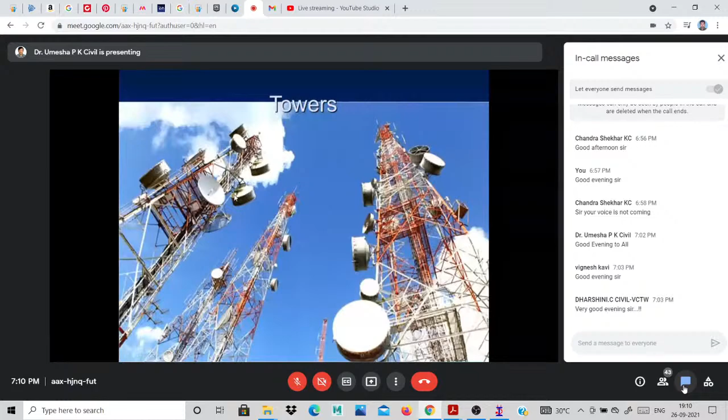It's a question. These are all cantilever towers, so all the antenna will be hosted along the tower. It may be having a dish antenna, or GSM antenna, or different types of antenna, all used for communication.

You can see here, this is a TV tower. It can be a steel TV tower or a concrete TV tower. This is another type, a microwave tower, and this is called a pole type tower. It's having only a pole.

You can see here, a number of antennas will be posted at the top of the pole. And for the police, telecommunication, or communication between place to place, they'll be using guyed towers. If you have a large area, they'll be having guyed towers like this.

Usually it requires a large area for the tower. One mast will be there at the center, and it will be tied with guy ropes at different levels. It will be very economical, but it requires a large area. That is a disadvantage here.

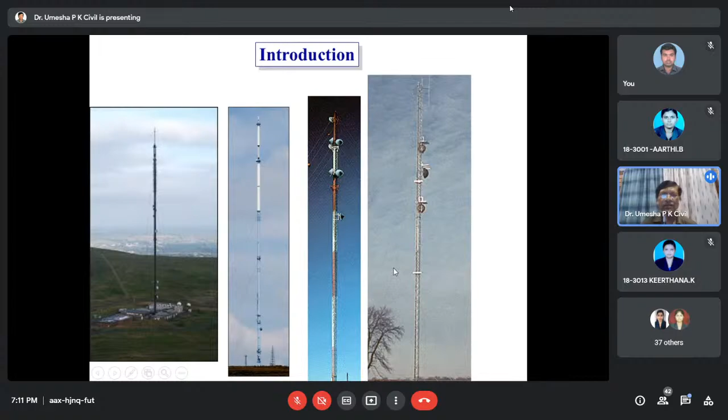Tower and tower-like structures are the two major infrastructures for transmission of electrical power or telecommunication and broadcasting. The towers are highly repetitive, you might have seen so many towers everywhere, either electrical power or communication towers. It has to reach from one place to another place, having the same line of sight.

Communication towers will be having the same communication line of sight, so it will be repetitive. Hence analysis and design should be highly competitive, toward commercial solutions. So what you want to do is optimize the tower design so that minimum weight and optimum efficiency is achieved. That you have to see.

These towers may be used for different telecommunication purposes. Today I will talk only about telecommunication and broadcasting towers, not power electrical transmission lines. Only telecommunication broadcasting towers. So mainly, what are the telecommunication types?

Microwave towers, television towers, radio transmission, receiving signals from the satellite - for that also they use towers, and receiving signals from air traffic control. These are some different types that will also be there. So we'll see how we're going to design this type of tower.

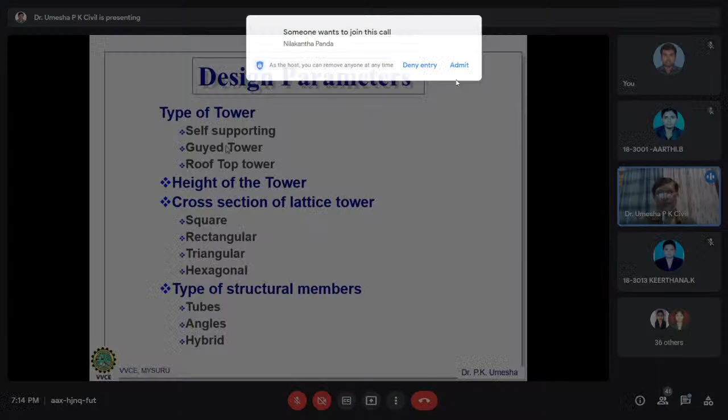Rooftop tower: in the city area, they want to use the rooftop tower on top of the existing building. So we have to take a lot of consideration for how to design a rooftop tower - it's very interesting. They have to consider the building height, the condition, the health monitoring of the building, and the height of the tower.

Its height also depends - it may be 50 meters, 20 meters, 100 meters, or 150 meters. Height also matters because of the wind load, which varies from base to top. Because of that, the height is very important.

The cross section of the lattice tower may be square at the bottom, or rectangular, or triangular, or it may be hexagonal, or circular. The types of structural members, as told earlier, may be tubes, angles, or hybrid. Hybrid means tubes will be there and angles also will be there - there are different types.

So once you see that, what is the condition? These are the different parameters you have to consider for the design of towers - starting from the type of structure, terrain type, loading condition, type of tower, and height is also very important.

Cross section also matters - square will be having diagonal wind loading. There also have rectangle and triangular to consider. Of course rectangle is similar to square only. Triangular will be having load acting on the normal surface and also from the backside to consider.

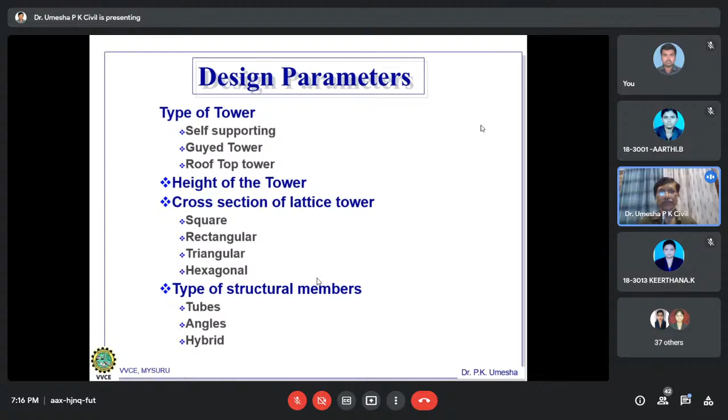So in the design parameters, the wind IS code is also very important - what code you are going to consider for the design of these telecommunication towers, that's also very important.

Previously they used to have IS 802 as the code for the design of telecommunication towers. But now they insist you should go as per IS 800 2007 for the design of telecommunication towers. If somebody wants to use IS 802, they should check the load factor - it doesn't have any load factor. It's the code for power transmission line towers.

So mainly there are a lot of transmission towers, and they want to optimize the weight, hence they don't have any load factor. So if you are designing for the telecommunication tower, you should use the load factor.

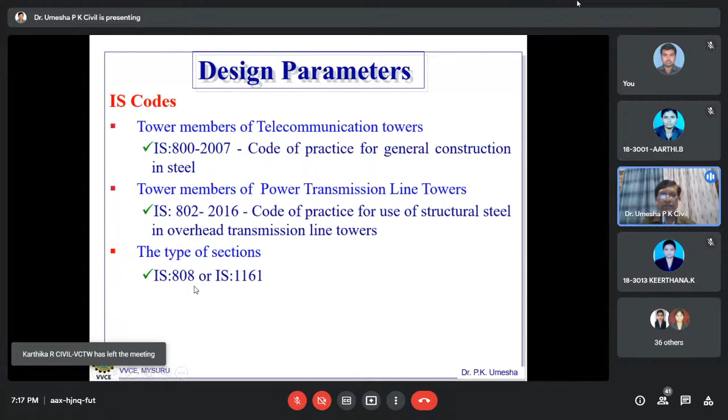For the type of sections, it will be there in 808 or 1161 that you have to use. Another one is the material used for the tower members - the grade of steel is given in IS 2062.

And for wind load, we might have seen the different IS 875 codes - part 1, part 2, part 3, part 4. Part 1 and part 2 are dead load and live load. It's IS 875 part 3 that has been revised in 2015 - this is only for wind load conditions for buildings and structures, applicable generally to all types of buildings and structures.

IS 1893 part 1, 2016 is the criteria for earthquake resistance design of structures, which provides provisions for buildings. Another code, IS 1893 part 4, gives criteria for earthquake resistance design of structures for industrial structures, including stack-like structures.

Here they include the transmission tower and telecommunication tower. So if you are designing a telecommunication tower, you have to take into consideration IS 1893 part 4 also - that's very important. So we'll see how these codes will be applied for the loading condition.

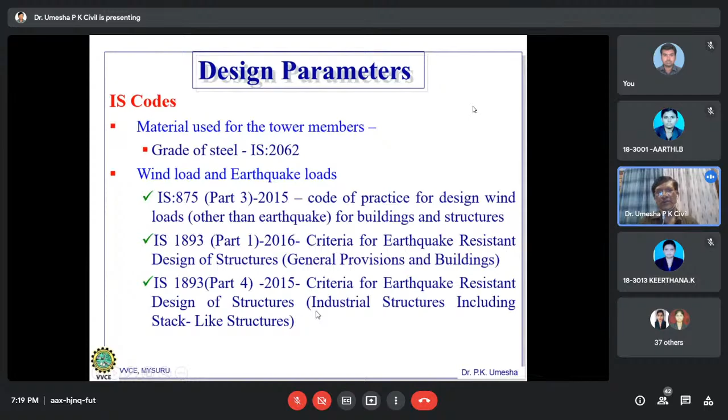So I'll talk about wind load and earthquake load. Now, what's a component? First let me explain the anatomy of a tower. A tower means it will be having panels - what is a panel? I will explain that.

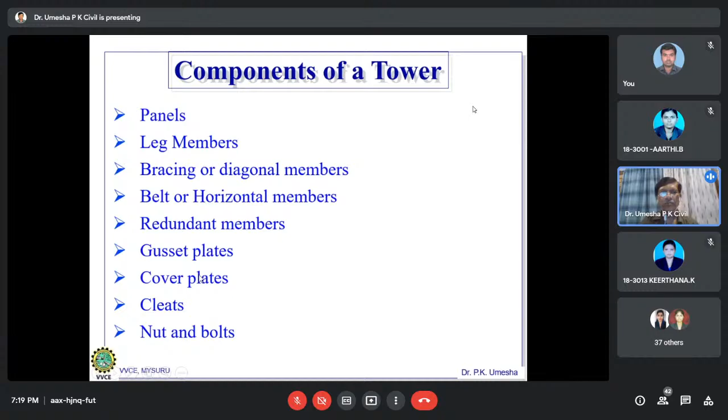What's a leg member? Bracing or diagonal member, belt or horizontal member, redundant members, gusset plate, cover plate, and nuts and bolts will be there.

Generally you might have seen the tower, full towers will be like this. One from here to here, that color differentiation you might have seen, this is called one panel. So there is one panel here, this panel. The tower will be having the main members, 4 or 3 or 6, projecting from the ground level to the top. That is called leg members.

If we have the diagonal members, also called bracing members, main bracing members, it will be there. It may be K bracing or X bracing like this. In between, they will be having secondary bracings, used to reduce the buckling factor. If we have a tower leg member from here to here and we want to reduce the buckling length, that is very important for the compression design of members. In that case you can have secondary members so that the buckling length is reduced. If we divide it by 4, the total length divided by 4 is the buckling length for compression, reduced to 1/4.

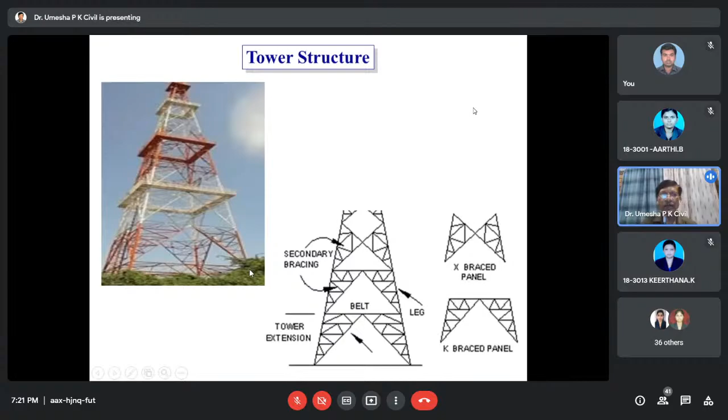Like that, different panels you can see here. This secondary member you might have seen in the tower also. So here you can see what is a gusset plate.

Gusset plate will be connected from the leg member to the bracing member, and they will connect with nuts and bolts. This is gusset plate. And here these are cover plates.

You might have seen, from one member to another member, they will be connecting with cleat angles as well as cover plate. Cover plate will be there outside, and cleat angle will be there inside of this angle. This is a main leg member projecting from here to here.

They want to connect at this point, or at every 6 meter length, they provide it outside, that is called cover plate. It's not fully connected. Here you can see all the bolts will be there, and inside also there will be a cleat angle. You might have seen single shear, double shear. So if you provide cover plate as well as cleat angle, it will be double shear.

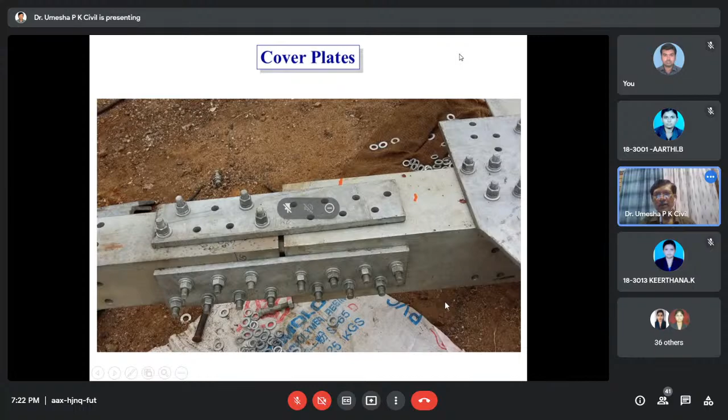This is the gusset plate you can see here also, just trying to connect this one. And here you can see this is called cleat angle, it will be inside. This angle member will be used for the tower.

It is actually star angles. Star, you might have seen that two angles will be connected like this. They will also be having cleat angles here, connecting from one leg to another leg member at this point. You can see a number of bolts, so many bolts, and leg members will be very heavy. If you want heavy load, they will be using star angles for the tall towers.

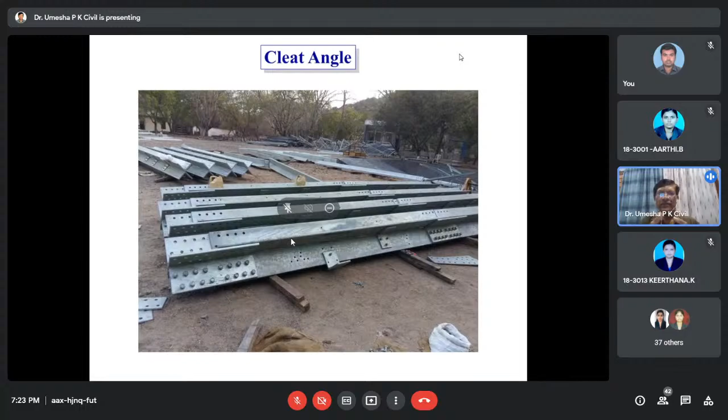For small towers it will be only maybe 100 by 8, 110 or 130. For 150 meter height, like TV towers, they should use star angles. Star angles means two angles connecting here. Once again, cover plate as well as cleat angle will be there.

If you want to reduce the width, bottom, if you have a reduction, it will become very narrow, and the foundation forces will be more. And if you have a large area, you can increase the base width, foundation forces will reduce, and you have to optimize the weight as well as foundation forces. That is also very important. If you cannot have large base, if you have large base width, the bracing members will become more, so it will increase the weight of the tower. So you have to optimize both on that one.

And geographical location of the location for wind and earthquake loads. So you might have seen that IS 875 and 1893, it divides our country into different zones. So you cannot use the same tower in all zones. So that is very important. So I will show you that on how it will be varying in our India for wind as well as earthquake load.

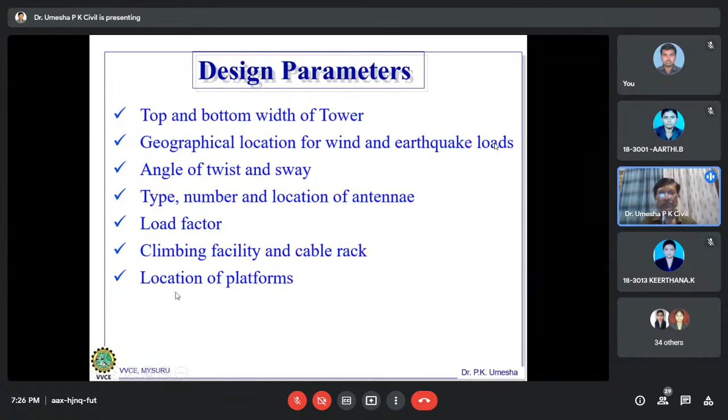This cable, you might have seen that one. So many towers will have cables running from top to bottom. So they will be providing the cable rack so that they will tie it in the cable rack so that it will come down in a line without any disturbance when wind is blowing. And also location of platforms that also attracts wind load. So that is also very important towards the location of the wind platforms.

So computation of loads, the thing on the tower, it will be wind load on the tower members. You might have seen the tower members are very skeletal. It doesn't have any wind load and all. So it will be having more wind load than our other buildings also. So antenna, what are the types of antenna, ladder, platforms, members - all the things it will be attracted by the wind load. And dead load of the tower members, antenna, ladder, platforms, and their mounts - that also have to consider.

Live load on the antenna platforms and rest platforms, that also required. Seismic loads you have to consider. And similarly, miscellaneous loads like erection loads, temperature loads, ice loads in different areas of the country. You have to consider the ice load, either the ice load or temperature load. The erection load is required to erect the tower at different heights.

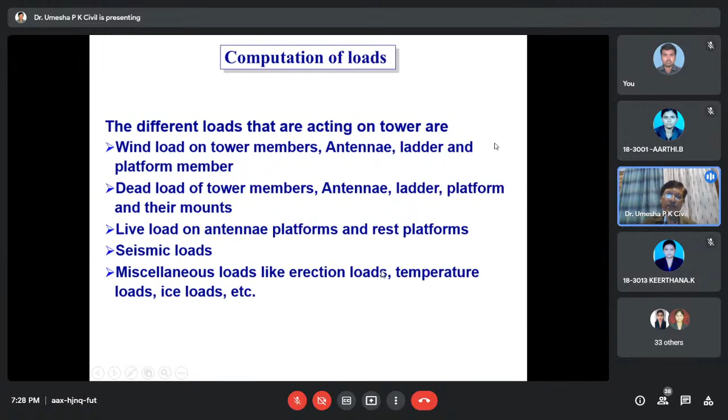So wind load, if you consider in the tower in our India, wind load is the most important of all. It often governs the design. Whatever it may be, the wind load affects it. So in India, I have seen a lot of towers we have designed. So far, we have designed towers governed by the wind. So dynamic effect due to wind.

So another criteria is called - if we have a natural frequency of the tower less than 1 hertz, I think I mentioned here, less than 1 hertz, then it will become very dynamically sensitive. So IS code specifies either the natural frequency less than 1 hertz or the height by breadth ratio greater than 5. Then dynamic effect has to be considered. In most of the cases, a tower up to 100 meter, dynamic effect will not control. Live load usually will be negligible. Why? So live loads, when cyclone is there, nobody will climb the tower and do the work.

That's why live load will not be considered for the combination. Only dead load and wind load or earthquake load should be considered that way.

Seismic load is considered in some cases. If we have a large mass at the top level of the structure, seismic load will be governing. In zone 5, usually the northeast zone or Kashmir zone, it will be governing. In Kashmir zone and northeast, ice load will also be there.

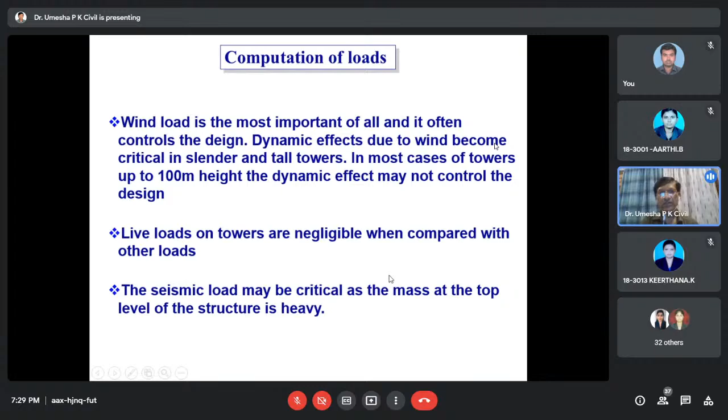For all this load condition, we have to follow IS 875 for wind load, IS 1893 for earthquake load. If we see IS 875, the design of communication towers is primarily governed by the evaluation of wind loads and their responses.

Wind velocity varies in a random manner, both in time and space. So IS 875 gives the basic wind speed, which is called the 3-second gust velocity at 10 meter height in category 2.

I will tell you what category 2 is. Category 2 is defined as the basic wind speed, that is the 3-second gust velocity at 10 meter height. In category 2, it's called basic wind speed.

The entire country is divided into 6 regions. It will have basic wind speeds of 33 meters per second, 39, 50, and 55 meters per second. So there are 6 zones divided.

The basic wind speed has been worked out for a return period of 50 years. The designer should select the basic wind speed depending upon the location of the tower, according to where you are locating it.

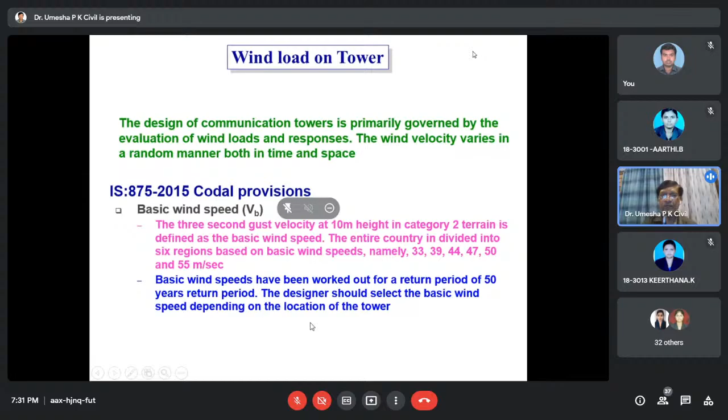If we look at the south, except in the coastal region, in places like Karnataka or Tamil Nadu, it will be having either 39 or 33 or something like that, less than the other zones. The blue will be 33, this will be 39, 47 like that.

So the difference is, whatever tower you have designed for Tamil Nadu or Karnataka, it may not be applicable for the northeast zone, because there is a different wind speed there. Wind speed is very, very important.

Then basic wind speed, and also the height of the tower. I'll just show you that one.

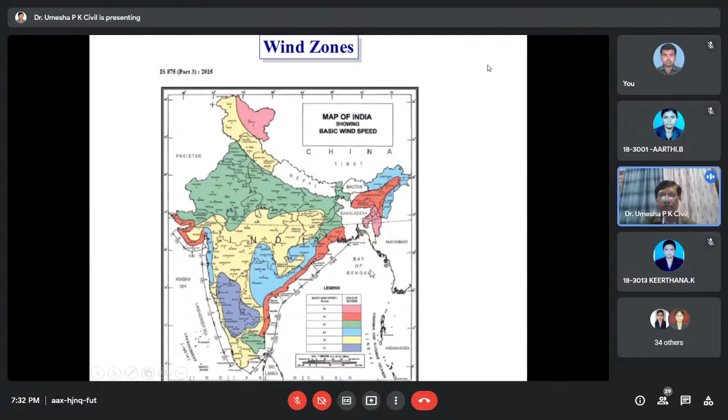It will have the across wind effect, along wind effect, and also torsional load effect. So all three effects should be considered when designing the tower.

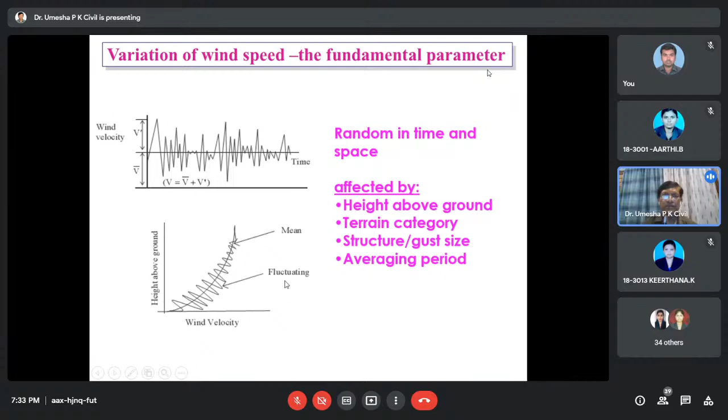As I told you, it will be random in time as well as space, affected by height above the ground, terrain category, structure or gust size, and averaging period. So all these things will be varying.

So whatever the basic wind speed is, use only the basic wind speed for that region. We need to calculate the design wind speed, which is calculated at a different height.

If you take 10 meters only, they give the basic wind speed. If you take 11 meters, it will be a different wind speed. Again at 20 meters, it will be different. How do we calculate that?

IS 875 gives a rational formula for the design wind speed, using the basic wind speed and K1, K2, K3, K4 factors.

It depends upon K1, the probability factor; K2, terrain category, height, and structure size factor; K3, topographic factor; and K4, importance factor for cyclonic region. 1.3 for post-cyclone importance and 1.15 for industrial structures, that is K4.

Recently in 2015, they introduced K4. Previously, they used to have only K1, K2, K3. You can see here how it works.

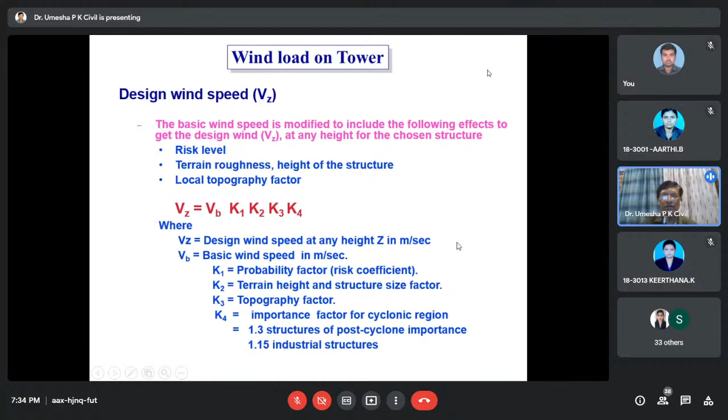For example, the K1 factor, the risk probability factor, is based on the statistical concept which takes into account the degree of reliability required and the mean probable design life of the structure in years.

If you see in the IS 875 table 1, it gives the K1 factor for different wind speeds and different class of structures, and the probable life of the structure in years. If you are designing any general structure or building, you consider only 50 years, so for all wind speeds it will be one value. That's why you can see here it is 1.

For communication towers and buildings, we should consider the probable life of the structure as 100 years. You can see the values for K1 for different wind speeds, varying from 1.05 to 1.08. So it's a small variation, but it's 5% to 8%. That is the K1 factor.

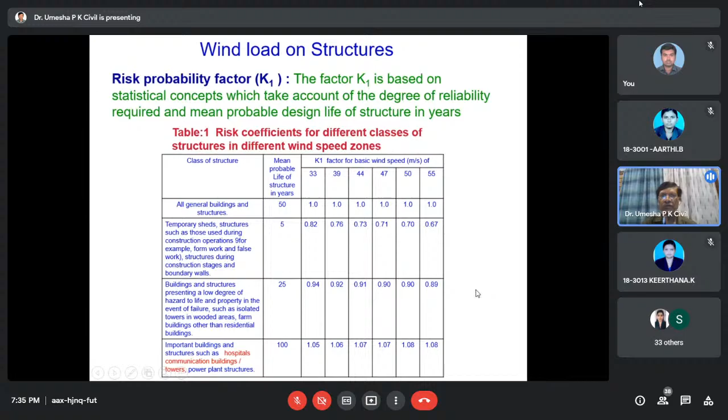K2 factor depends upon the terrain category. What is terrain category? There are 4 terrain categories. The first terrain category represents open sea or lake or unobstructed coastal area of land. If you take a coastal area of Tamil Nadu, it will be having no obstruction, so that is considered terrain category 1.

Terrain category 2 is defined as with scattered obstructions representing rural area. It will be having only scattered obstructions similar to this one.

Category 3 is characterized by closely spaced obstructions, called suburban residential area or manufacturing districts or wooded fields. This is terrain category 3. If you go to Bombay or Delhi, it will be having high-rise buildings, so you can consider that as terrain category 4, which is local, regional, large cities or urban areas.

Usually you consider terrain category 2 for our tower if you are in a small city, something like this.

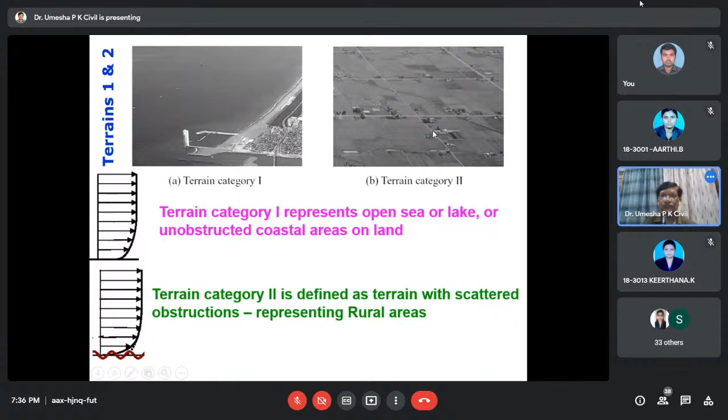This K2 value depends upon the terrain category and height. In table 2, you see the factor to obtain the design wind speed variation with height in different terrains. Previously they used to give each terrain category as A, B, C; that they removed now and made it only one.

So selection of terrain category is very important. According to the category where you are located, you have to define the terrain, and based on that, the values of K2 will vary. K2 factors are obtained for the design speed at different heights.

If we take terrain category 1, for up to 10-meter height it will be constant at 1.05. Variation will be there for 15-meter, 20-meter, and so on, varying up to 500 meters where it is 1.35, with different variation at each height. If you want to calculate for, say, 12 meters in between 10 and 15, you have to interpolate between these two.

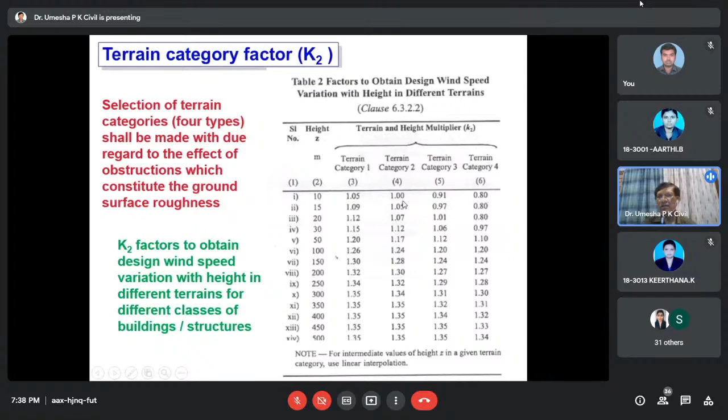The K2 value will vary between 1.05 and 1.09, so you have to interpolate for 12 meters. Similarly, you have to do this for different terrain categories. That is K2. Then K3 is the topographical factor.

Local features like slope and hills, valleys or ridges will affect the flow of wind and hence modify the wind speed. If you are constructing a tower on top of a hill, you have to consider the K3 factor: how tall it is from the ground level, what is the slope, and how far it is. There is a distance L, distance W, H, and crest, and the IS code gives you clearly how to take these into consideration for calculating K3.

So for slopes up to 3 degrees, you can take K3 equal to 1. It will vary from 1 to 1.36 for slopes greater than 3 degrees.

Then K4 factor, as I told you before, this was introduced in the recent code to ensure better safety of the structure in cyclonic storms. The cyclonic storm region is up to 60 kilometers wide on the east coast as well as the Gujarat coast. So from the coast point, up to 60 kilometers wide, you have to consider that K4 value in these two regions, that is the coastal area of the east coast as well as the Gujarat coast.

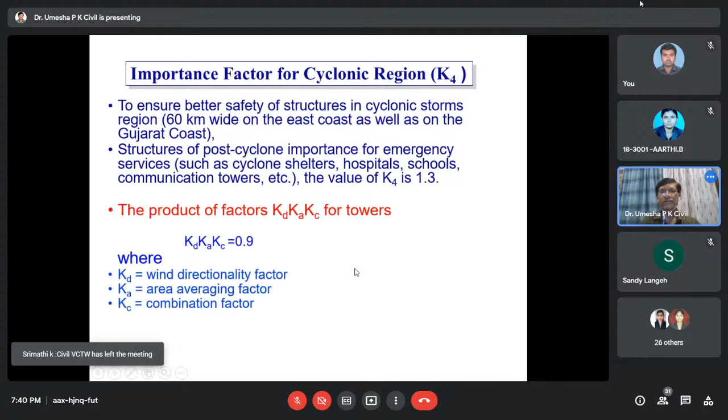Once we calculate the design wind speed, that is Vz, it's the multiplication of basic wind speed into K1, K2, K3, K4, and Kd, Ka, Kc. With all these factors, you will get the design wind speed.

Then we need to calculate the wind pressure, that is Newton per meter square, at different heights. This wind pressure varies from bottom to top at different heights. So Pz, the wind pressure at a different height, equals 0.6 into Vz square. Then the design wind pressure will be Kd, Ka, Kc into Pz. That is the design wind pressure.

Once you know the design wind pressure, pressure into area will give you the force. That is our intention - starting from the basic wind speed, we calculate the design wind speed, then we calculate the pressure. But once you know pressure into area, you get the force - but that alone is not enough.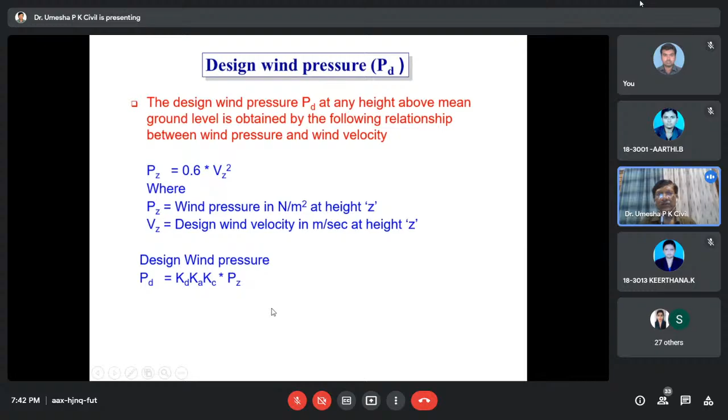Another factor depends upon the force coefficient. So force equals area into pressure, and also CF, that is the force coefficient. You need to calculate the force coefficient for skeletal structures and tower structures. That depends upon the solidity ratio of the tower.

AE is the effective projected area - whatever members are there, that area only has to be taken. Flats will be there, one side leg member, other side also leg member, and bracing members - all the length into width, whatever the width is. For example, if we have a flat of 50 by 5, you take 50 as the length dimension. And a leg member of 100 by 8, you take 100 into that length.

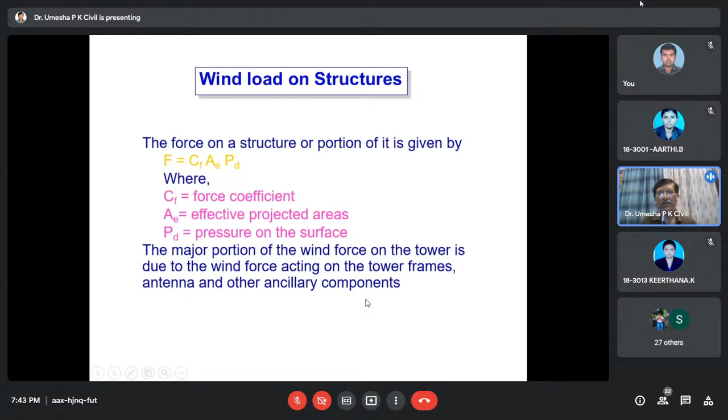So all these things you have to consider for the projected area, AE, and PD is equal to pressure on the surface. A major portion of the wind load on the tower is due to the wind force acting on the tower frames, antenna and ancillary components. Ancillary components means ladder or cable racks - all these have to be called ancillary components. Once you know your tower configuration - leg members, bracing members, secondary members, and ancillaries - all these will be there.

Then we need to calculate the force coefficient, which depends upon the solidity ratio. To calculate solidity ratio, if we have a tower, take it as straight - this is the tower leg member running parallel without inclination. Most towers will be inclined like this, but for your clarification, I will take only the parallel one. So what is the hatched portion you take here?

This is a small verification, and if you have ancillaries - whatever cables or ladders are there - all these are considered ladder ancillaries, denoted AAA. This is for the structure, AAS, the structure member area, that is the hatched portion, and the ancillaries, that is AAA. If you have AAA, you have to consider that divided by H into B, the area of the total enclosed portion. Similarly, if it is an inclined member, you have to take the trapezoidal area here - the hatched portion - that is AAS.

For a square tower with flat members, the maximum wind load occurs in the diagonal direction. So normal wind will be acting normal to the tower, that is P. You have to take 1.2 times of P in the diagonal direction for the square tower.

For the triangular tower, it is not like that. Whatever load is there, we have to apply normal to the tower at 0°, 90°, and 180°. Whereas for the square tower it is normal at 0°, that is normal to surface, and diagonal at 45° you have to consider. This is the flat force coefficient for the flat surface, square tower and triangular tower.

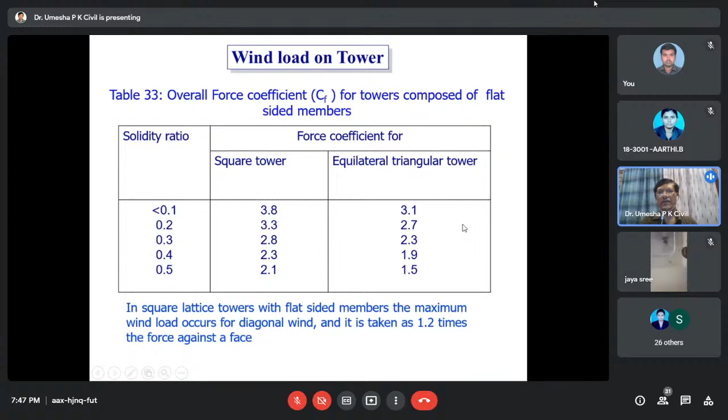Let's explain here. If you have a normal wind, you have to distribute the load as 0.5 P and 0.5 P. Either you can take the front node, or you can divide by all 4 nodes, because it's acting at different levels, it's only shear at that level. So all 4 you can consider, or 2 you can consider, it doesn't matter; height into the load is what matters.

If you have a diagonal wind load, that will be at 45°. So if the normal wind load is P, then 1.2 times of P is taken, and if you take sin 45 cos 45, the component will come to 0.424 P. So you can either use all these 3 or 4, it doesn't matter.

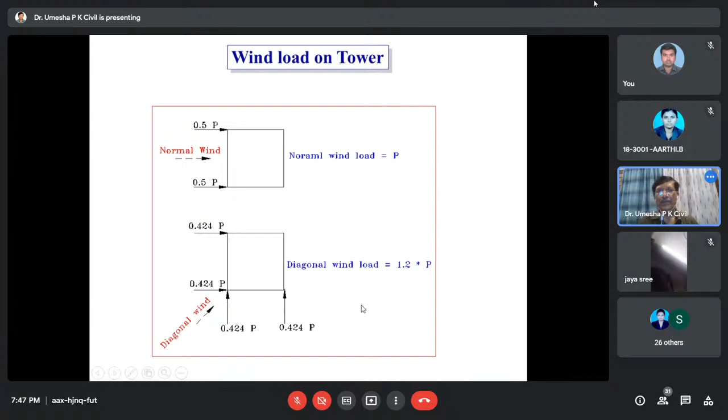But one problem is fabrication; you have to take care of that. If it is not fabricated properly, it will start corroding, and that's a bigger issue. That's why most towers will go with angle sections instead.

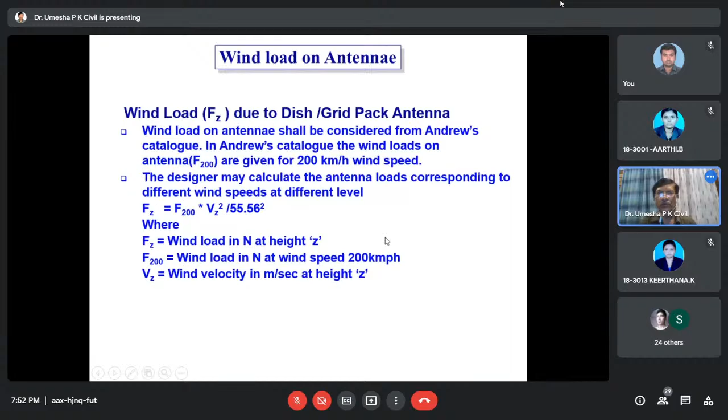Okay, that's clear. So wind load on the antenna and the feeder antenna, you have to calculate as per the Andrew's catalog. If you search in Google, you'll get the Andrew's catalog, you can download and make use of that one. So this is the different antennas that will be there.

This is called GSM antenna, and this is a dish antenna. All this dish antenna, with radome, without radome, so many types will be there, and how it will be connected, these are all the connecting members. All the things, wind load you have to consider, and you can see how many numbers will be there, whether you're providing the front side or back side is same. In the back side, if you consider, you can consider it as a shielding effect, that's also possible.

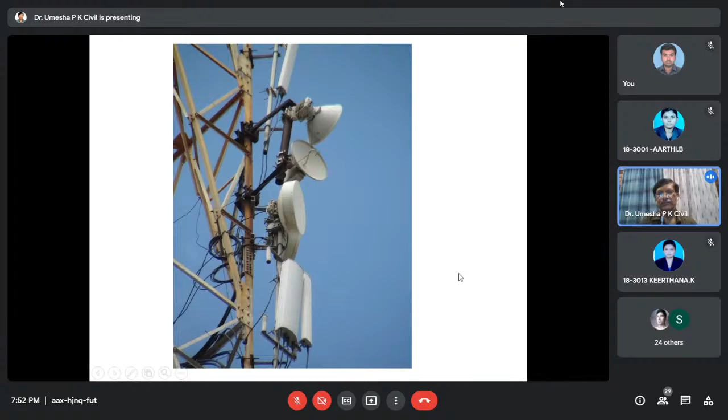So another one, the GSM antenna, how to calculate the force coefficient. In the Andrew's catalog, they have not given the wind load for GSM antenna, so we need to calculate using the exposed area of such antenna, by wind pressure and force coefficient. This force coefficient for the GSM antenna is considered as a flat CF.

It depends upon the aspect ratio. It will be given in IS 875 part 3, recently revised. So they have given the flat numbers, this value varies from 1.2 to 2. That is the CF value for GSM antenna, it will be varying from 1.2 to 2 depending upon the aspect ratio. Aspect ratio means the length divided by width ratio.

If it is less than 2.5, you can consider it as 1.2. If it is equal to 7, also 1.2, and if it is less, you can take that too. If it is greater than 25, you can take 2. In between, if it's coming, you have to interpolate, from 7 to 25 you have to interpolate from 1.2 to 2.

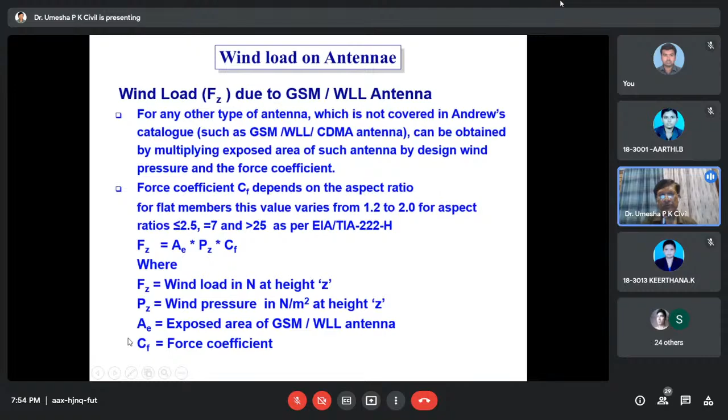Okay, so that is the CF value. So pressure, wind load you can calculate, wind pressure will be there, exposed area of a GSM antenna, force coefficient depends upon the aspect ratio.

Okay, once you have the tower with different base width, top width and middle width, approximately you can calculate the natural frequency of the tower. For a freestanding lattice tower with a rectangular or square cross section, the following formula can be used: natural frequency, first mode natural frequency, equals 1500 into WA divided by H square. WA is the average width in meters, H is the height of the structure or tower in meters.

If the natural frequency is less than 1 Hz, then the tower will be dynamically sensitive. Accordingly, if it is dynamically sensitive, IS code gives a different formula. Again, whatever is calculated, it will be having different methods, so if that is not satisfied, the dynamic effect of the wind load is to be considered. So there is one condition: natural frequency is less than 1 Hz, and the ratio of height to base width of the tower is more than 5.

Then you have to consider the tower as dynamically sensitive and calculate the dynamic effect. This is called the gust factor method. Section 10 of IS 875 part 3, 2015 gives the details on how to calculate this wind force on the tower by the gust factor method. Now it was very simplified in the recent code; previously they used to have so many charts and graphs and all.

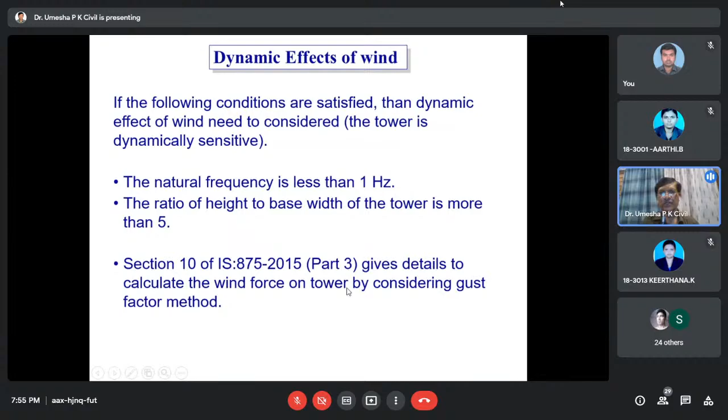Now it's very simple. They have given the formula one can use in an Excel sheet to calculate the value of G. So natural frequency, if the natural frequency is less than 1 Hz, then the dynamic effect is considered. In such case, clause 10 will be there. So that is force on the wind load.

Wind force will be CFZ, AZ, P bar D. That is here bar will be calculating. The another factor is called G, the gust factor as per clause 10.2. So force you can calculate on the tower. A is the effective frontal area.

PD bar will be design hourly. Previously we have taken 3-second gust, here hourly mean wind speed. How to calculate V bar Z - the code gives how to calculate V bar, and they have given the formula and table also. Using that table you can directly calculate the PD bar. Once you know the PD bar, you can calculate the force on the tower members on the different panels.

So force coefficient will be there. Once you calculate all these wind loads, you have to distribute them for the different panels. So there are so many panels - each tower will be having maybe 10 or 15 panels.

So from the top you have to distribute the load. For example, the top panel load will be some total load of that panel, say P. On the 4 nodes of that panel you have to distribute it - top 2 nodes, bottom 2 nodes. So P by 4 will be there for the first panel.

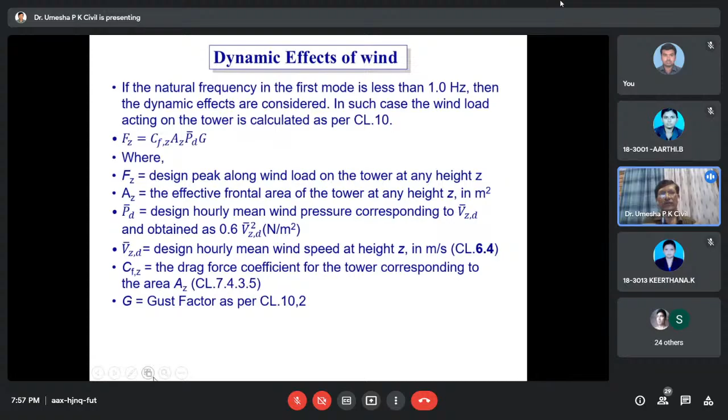If you come to the next panel, that total load will be P1. Next one total load will be P2, P2 by 4 again will be there. For the middle point, you have to consider P1 by 4 plus P2 by 4. Like that, you have to add up from top to bottom.

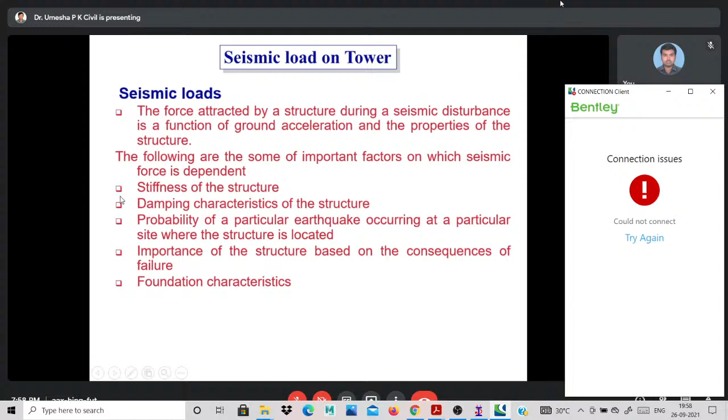Calculation. Now, seismic load you have to calculate as per IS 1893. The force attracted by the structure during seismic disturbance is a function of ground acceleration and the properties of the structure. The following are some of the important factors on which the seismic load depends: stiffness of the structure, damping characteristics of the structure, probability of a particular earthquake occurring at a particular site where the structure is located, importance of the structure based on the consequence of failure, and foundation characteristics.

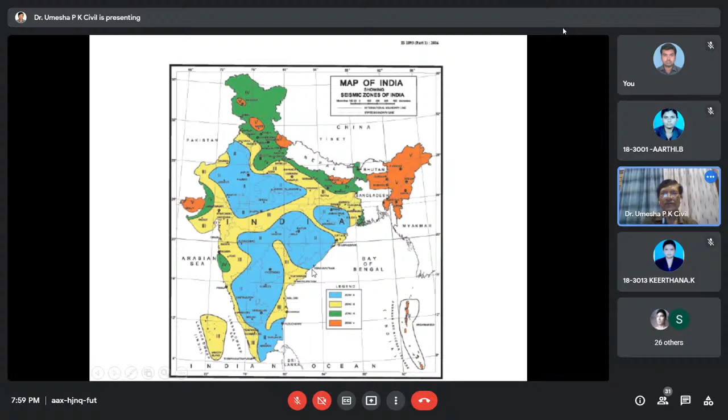Okay, Tamil Nadu and Karnataka will be having zone... some border of Andhra Pradesh will be zone 2. So accordingly, you have to take into consideration how to calculate the seismic loads and all.

So seismic load mainly has the factor mass into maximum acceleration. So force will be maximum acceleration by G, into mass into G. So maximum acceleration by G into weight - that's called the seismic weight of the structure. G is the acceleration due to gravity.

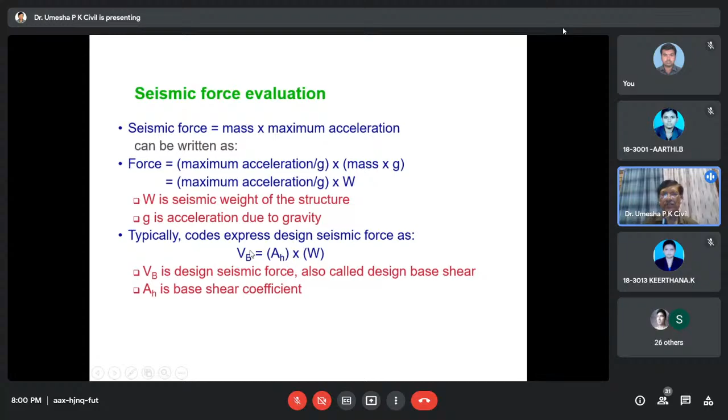Typically, the code expresses the seismic force as VB, that is base shear, equal to AH into W. So AH is the shear coefficient, VB is the design base shear. Once you calculate the design base shear, you can distribute the load for different levels. It depends on the severity of the ground motion, soil condition, and structural characteristics - that is time period and damping, all these things are there.

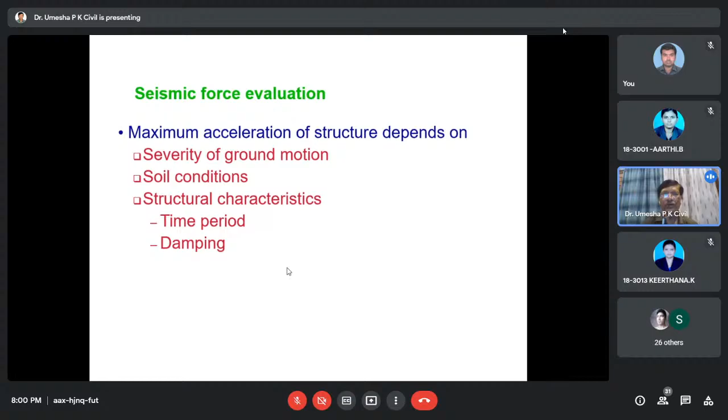The zone factor depends upon the ground motion. As I told you, India is divided into 4 seismic zones. In the recent code, that is 2016, they revised it. Again, it's going to be revised in 2022. The methodology may be same, but the coefficients may vary or the zones may change.

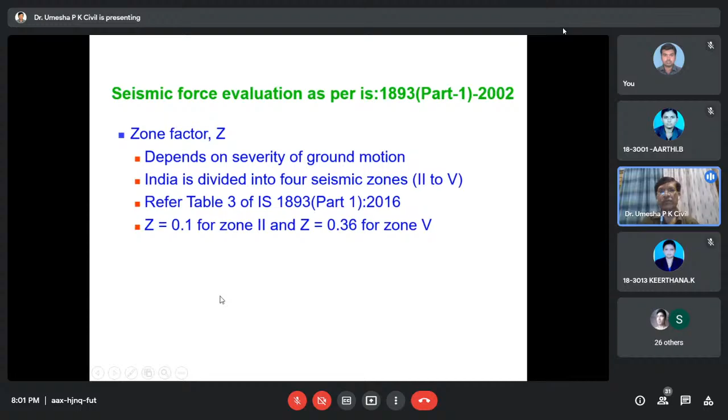The importance factor ensures higher design seismic force for more important structures. Value of importance factor for structures is given in table 8 of IS 1893.

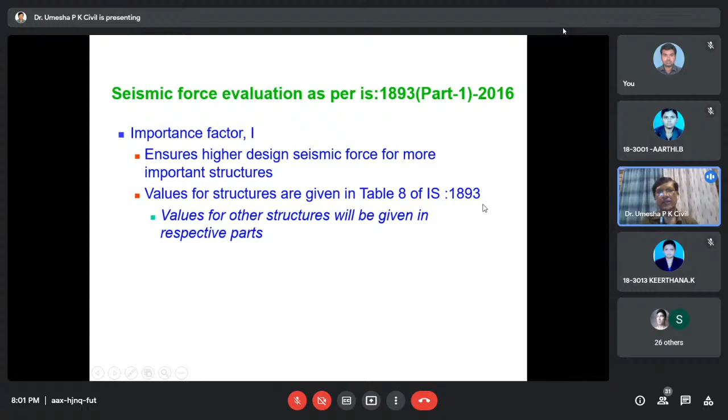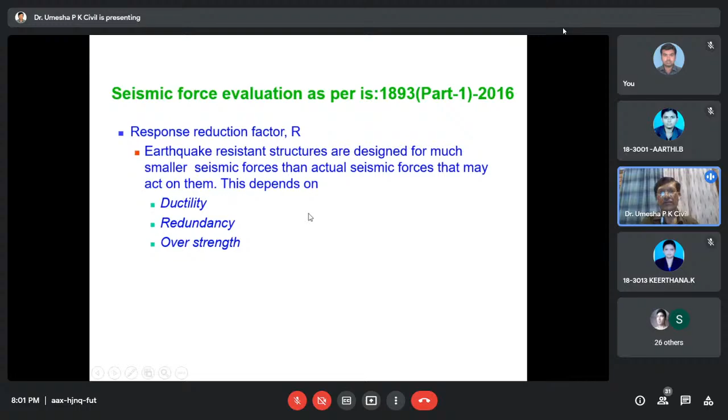Similarly, the response reduction factor means earthquake resistant structures are designed for much smaller seismic forces than the actual seismic forces that may act on them. This depends upon the ductility, redundancy, and overall strength.

So the response reduction factor for a structure with good ductility, redundancy, and overstrength is designed for smaller seismic force and has a higher value of R. For example, a building with special moment resisting frames has good ductility and R is equal to 5, as against R is equal to 1.5 for an unreinforced masonry structure.

So table 9 gives the R value for buildings. For tanks and industrial structures, stack-like structures, the R value is given in part 4. So you have to use IS 1893 part 4.

So once you know the base shear, we have to distribute it along different heights of the tower.

Seismic weight of the tower is the sum of the seismic weight of all the angle sections. Seismic weight at any level would be equal to the dead weight of the tower system, antenna and their connections, platforms, ladder, cable racks, and cables also have to be considered.

The design base shear, VB, is then distributed along the height of the tower using a parabolic distribution, using this formula: Qi at different levels, based on the seismic weight, total seismic weight, and h square at different heights. So it will be distributed according to the different height, and you have to analyze it.

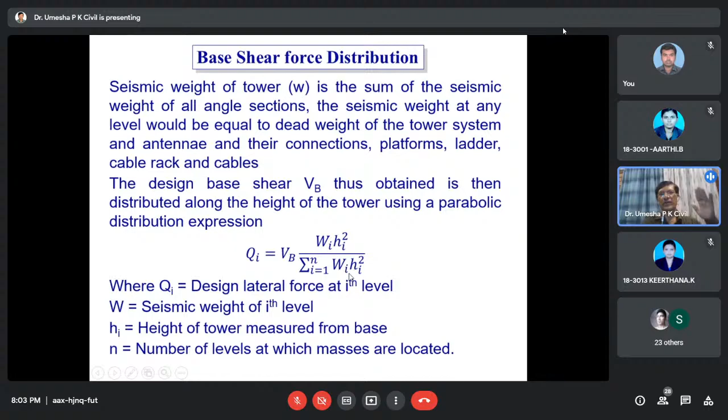As I told, IS 1893 part 4 2015 is the criteria for earthquake resistant structures, industrial structures, including stack-like structures. They mention transmission and communication towers, and other cooling towers, chimneys, silos - all these things will be there. So if it is a very important structure, you have to consider seismic loads also.

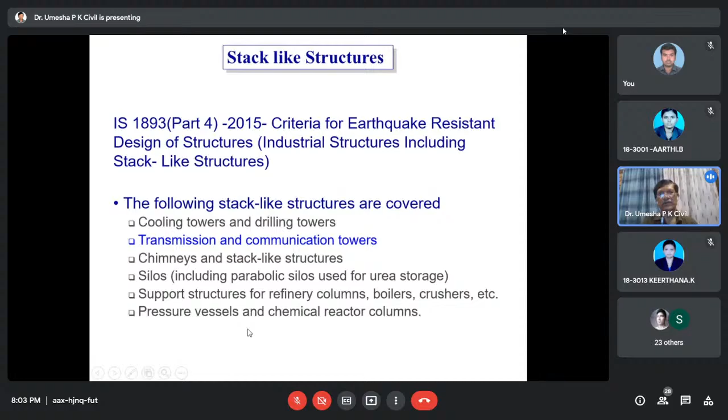So once you calculate all this load, you have to do the analysis. You might already know how to do the analysis of tower structures and general structures. You have to model it, and once modeled, transfer the load to different nodal points, considering connectivity, load transformation, and different loads - dead load, wind load, earthquake load, live load will not be there, and other things you have to consider.

In the market you will have so many softwares - you may be aware of STAAD Pro, ETABS, SAP 2000, and if you want to do research, you can use Abaqus or ANSYS. If you are going for research work, you use these types of software. If you are going directly for design, you can use ETABS, SAP 2000, STAAD Pro, or MATLAB will be useful.

Once you know the load calculation, you transfer your tower configuration to whichever software, then apply the boundary conditions and apply the different loads. You'll have different loading conditions - let me go through the steps.

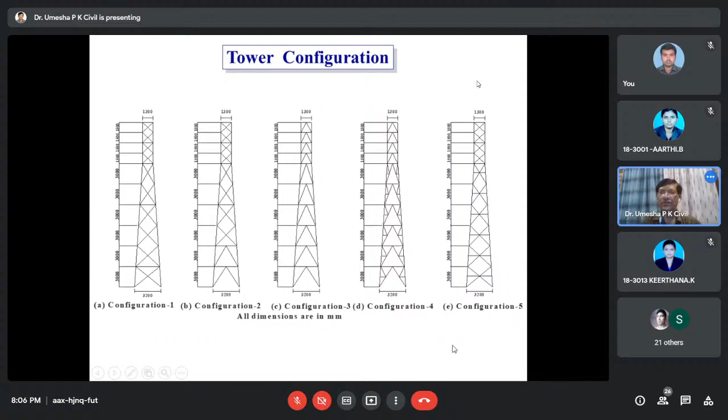So the design of communication towers. Here mainly all the members are truss members, and each should be designed as either compression or tension. You may already know how to design the compression member as per IS 800 2007. For all the tower members, there will be reversible loads - alternating compression or tension. So all tower members have to be designed for both tension and compression, as per IS 800 or 802 with load factor. For tubular sections, you have to use IS 800.

I think you might have already studied this in your UG program. It will be the same procedure, nothing different. Only thing you should be very careful about while taking the tension member is the direction of the bolt. You should always have an alternate bolting system.

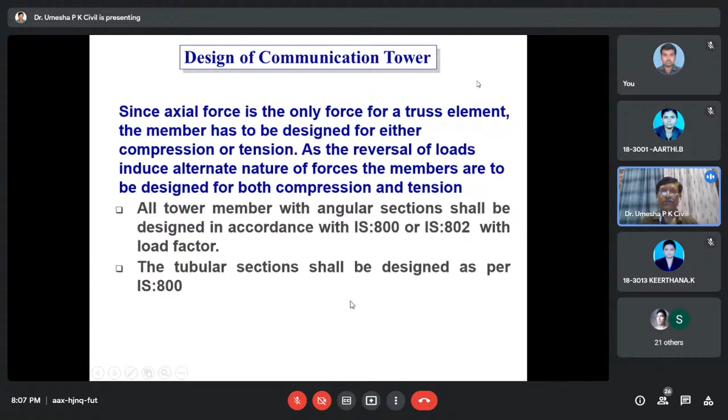So these are the limit states of strength. For different load combinations in IS 800, use table 4, that is the partial safety factors for loads - for limit state of strength as well as limit state of serviceability. For limit state of serviceability, if you want to check deflection, you have to use this load combination. So if you are designing a tower member, you have to use this load combination.

I told before, the dead load and live load combination will not govern. So you have to use dead load plus wind load.

Sorry, one moment, sorry for the interruption. Take a 2 minute break, sir. You want to take a break? Sir, your wish, your wish, sir. No, no problem, okay. If you wish to take it, take 2 minutes, no problem. So you will continue, sir? Otherwise no problem, sir. Yeah, yeah, 1 minute, just take some water. Okay, sure sir, sure sir. Okay, we'll continue, no problem.

So, limit state of strength. Mainly you have to consider dead load plus wind load or quake load. It means we'll be having a dead load factor of 1.5, wind load 1.5 - I think this will be the governing condition. Another one is 0.9 times dead load and 1.5 times wind load, which will govern for tension. So 1.5 and 1.5 partial safety factor will govern for compression.

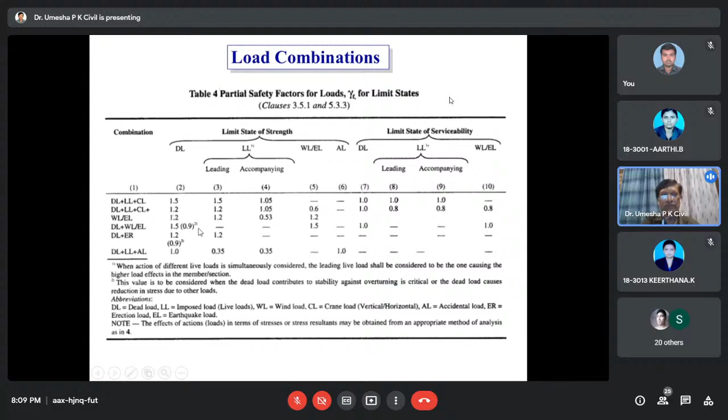So if you are going for tension, you have to check for 0.9 times dead load and 1.5 times wind load or earthquake load. Whereas in limit state of serviceability, you need not worry - it will be 1 and 1 only. Live load will not govern. You check for these two conditions, it will be enough. Okay, then I'll just show you here.

So load cases and load combinations considered for the analysis of the tower are as follows: dead load DL, normal wind load, and diagonal wind load for a square tower - it is very important for a square tower. Load combination with a partial safety factor.

As per IS 800, for limit state of serviceability it will be: dead load plus normal wind load, or dead load plus diagonal wind load. For limit state of strength it will be 1.5 times dead load, 1.5 times normal wind load or diagonal wind load. Similarly, 0.9 times dead load, 1.5 times normal wind load, and 0.9 times dead load, 1.5 times diagonal wind load. In this combination, whichever force is governing, you have to take that and design for both compression and tension.

Governing forces for the above load combinations are considered for the axially loaded member. So compression is there, and tension is there.

As per IS 800, as per Clause 6, the factored design tension T, the member shall satisfy T less than TD, where TD is the design strength of the member. So you have to design the member based on design strength due to yielding of the gross section, design strength due to rupture of the critical section, and design strength due to block shear. You have to check all these, and whichever gives the critical value, you consider for the TD value.

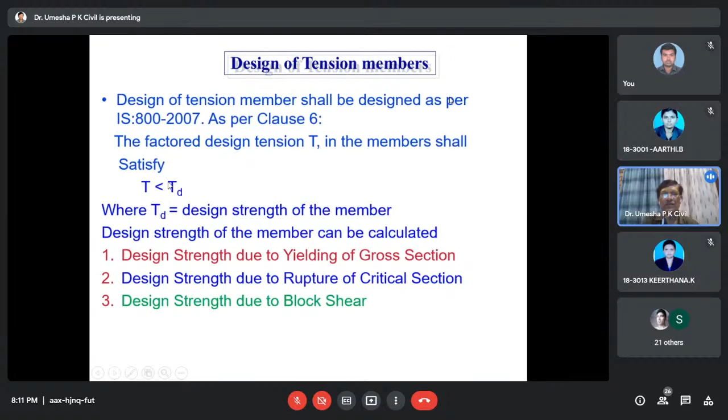Then Euler buckling - I think you know all about this. Euler buckling of columns, or global buckling of members, happens when the member in compression becomes unstable due to its slenderness ratio and the load. The Euler critical buckling load for a hinged column is P critical equals pi square EI divided by L square. So the general formula, taking critical stress, F critical equals pi square E, and we are interested in KL by R, where K is the effective length factor, L is the total length, and R is the radius of gyration - that is, the least radius of gyration.

So KL by R whole square will be there, pi square E divided by that, this is the factor that will be governing. So slenderness ratio KL by R will be there. If it's a short column, it will not buckle, it will only fail due to yielding. For long column, with large KL by R, usually elastic buckling will occur.

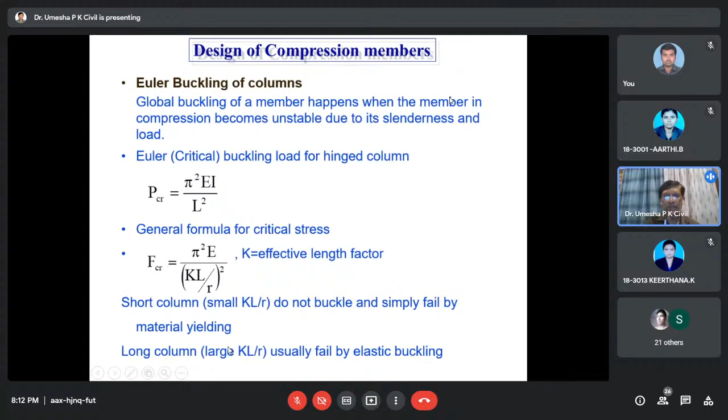Design of compression members shall be designed as per IS 800 clause 7. The factored design compression P in the member shall satisfy P less than PD, where PD is the design strength of the member, which depends on the following: effective sectional area, Euler buckling stress, effective slenderness ratio, non-dimensional effective slenderness ratio, imperfection factor, and partial safety factor of the material. All these factors are clearly given in IS 800, and you have to consider them accordingly to design.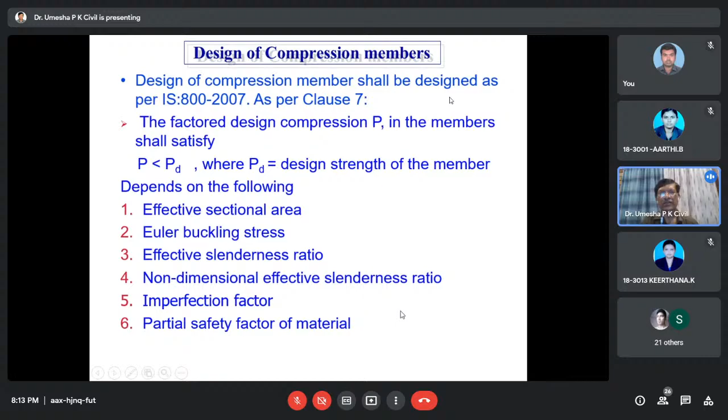Some clients ask you to design as per IS 802. You can design the tower, but you should consider a minimum load factor of 1.5. So whatever force is coming, when you design, increase the loads by 1.5 times.

If you are designing using IS 802, it gives the formula for axially loaded compression members. It clearly states that KL by R should be less than CC. CC depends upon the Young's modulus and yield stress, so CC is equal to pi into square root of 2E divided by Fy.

So if KL by R is less than or equal to CC, then the value of allowable stress will be given by 1 minus half into KL by R by CC whole square. Otherwise, if KL by R is greater than CC, then it's pi square E divided by KL by R whole square. This is clearly given in IS 802. All our members, I think, are following this approach, only the load factor should be used.

IS 800 gives it differently, whereas in IS 802, the B by T ratio limit gives different values. The critical yield stress depends upon the B by T ratio. If the width-to-thickness ratio exceeds the limit, this is called the limit given above in the formula for Fa.

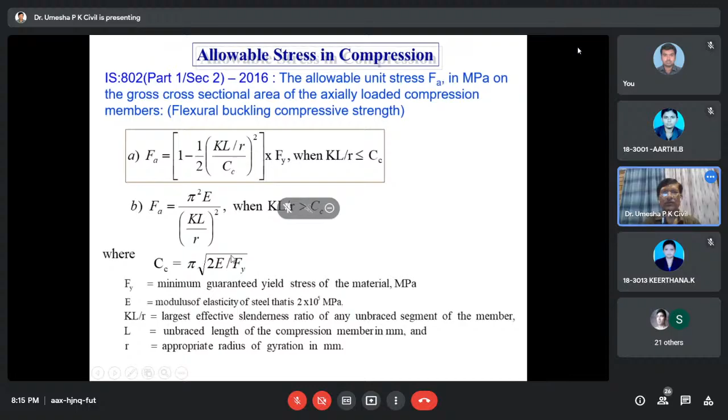The variable Fy will be substituted by F critical. So wherever Fy was used previously, you have to replace it with F critical, based upon your B by T ratio.

So if B by T ratio is greater than the limiting value, which is 210 divided by square root of Fy, and also less than 378 by square root of Fy, then F critical will have this value. If B by T is greater than 378 divided by square root of Fy, then F critical will be this other value. That means you have to replace Fy with this critical value, which will reduce everything.

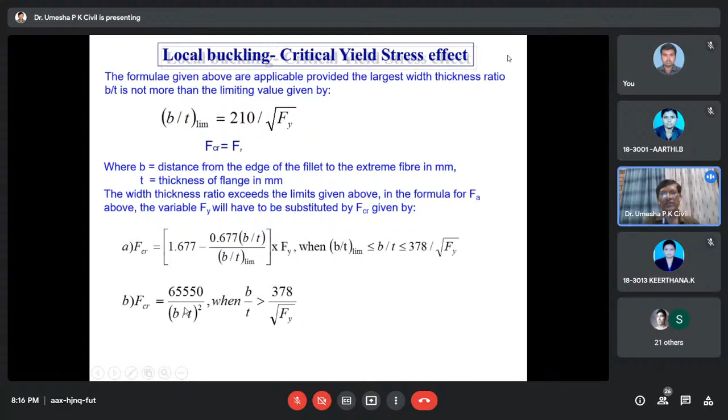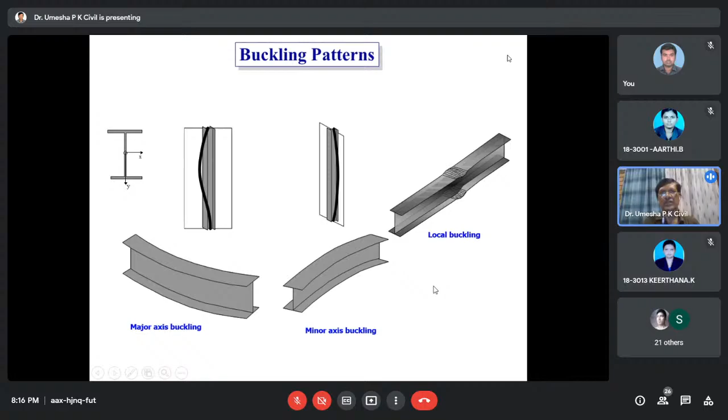So you might have seen buckling patterns here. If you have a member without support, it buckles like this. If there is a major axis and minor axis, buckling will occur accordingly. There is also local buckling, which happens in some members because the thickness is very small. So we have to consider both minor axis and major axis buckling for compression member design.

If you have a support at the center, for example, it will buckle like this, whereas in the other direction there is no support, so you have to consider the full length in that case. In one direction, RVV, the minimum radius of gyration, is taken with this length. In the other direction, with no support, you take the total length divided by RXX. So KL will be, 10 feet will be there, 5 feet and 5 feet for the minor axis buckling, whereas for major axis buckling, K will be equal to 10 feet.

The IS 802 code depends upon your number of bolts and how your bolts are connected. It also depends upon the value of L by R. Up to and including 120, KL by R equal to L by R will be there. So that is for single or joint members bolted at connections in both faces with L by R up to and including 120. If L by R value is less than 120, you can use directly L by R, L divided by R. The L by R value is given for different end conditions, whether one is restraint or not restraint. According to that, they give the value of KL by R.

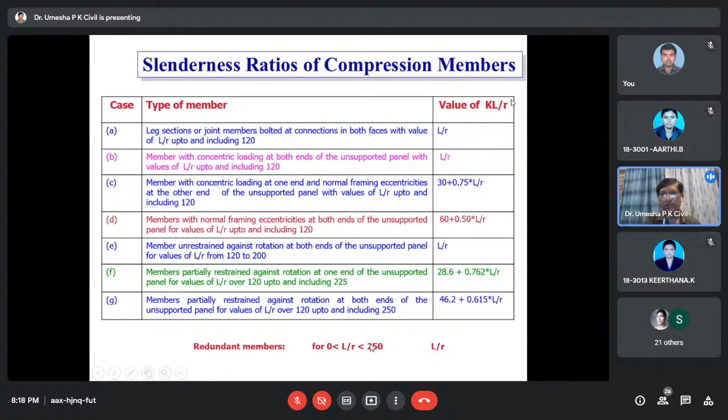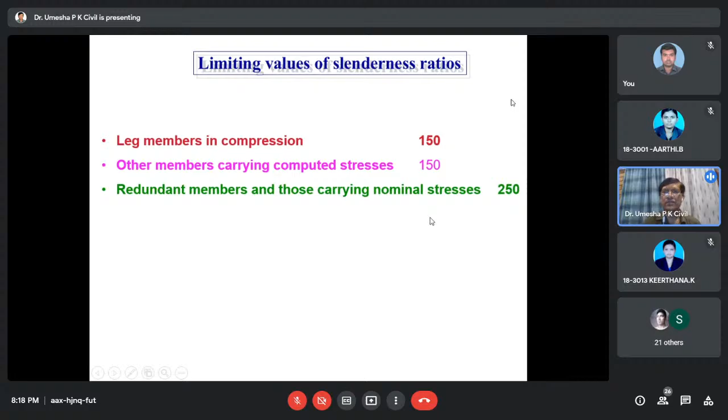Also for redundant members, they restrict L by R to less than 250. For leg members, in the recent code they increase the KL by R ratio, with maximum value 150. For other members it is also 150, and redundant members carrying only nominal stresses will be 250.

IS 802 also gives clearly how to take this length. For example, you will have secondary bracing like this. So initially, you have to take the length. If you have 3 divisions, whatever the maximum length is - here it will be less, here it will be less - among all the 3, you take the maximum value. That is L star, the maximum value.

Then the concentric load - this is one face, and this is another face, symmetrical. Usually all these towers will be symmetrical in both faces, so that is called concentric loading. We have to take the L by R value, L divided by R minimum. If there is no restraint at the end, it will be taken as L by R minimum.

This is the measured length - you have to take the maximum length. We should not take total length divided by 3. Take actual length - if you take in AutoCAD, you will get the actual length, divided by R minimum, which will be the minimum radius of gyration.

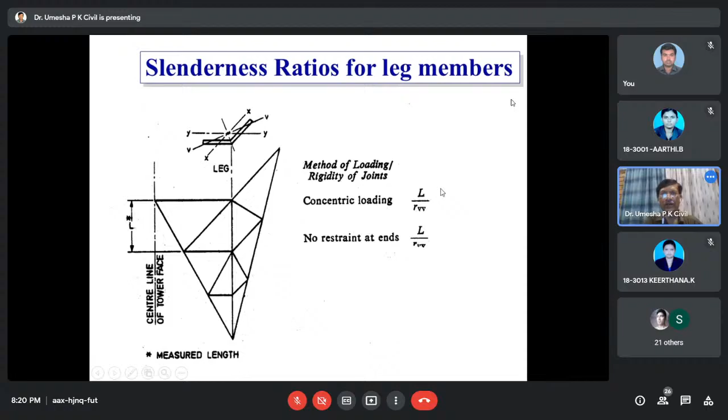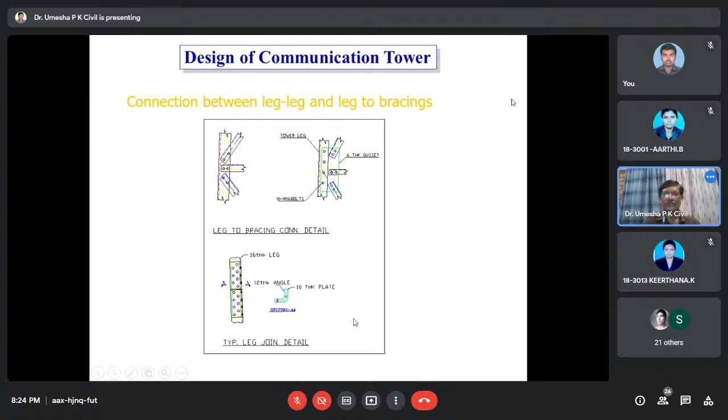Another important aspect is foundation design. Base plate design is given in IS 800, clause 7.4.3.1, which provides the formula for base plate thickness. You can use this formula: minimum thickness of the rectangular slab equals... where A and B relate to the angle from the square base plate.

The base plate will have an angle providing a smaller projection and a larger projection, which are the A and B values. The larger projection is A and the smaller projection is B for the angle. These values are substituted in the formula, along with the uniform pressure from below the slab.

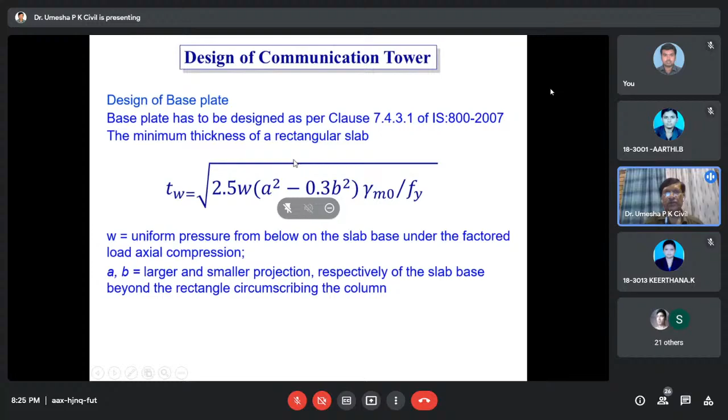The slab is under factored load, and there is axial compression from the tower that has to be considered. Then gamma M0 is the material partial safety factor, and Fy is the yield stress. Using this formula, we get the minimum thickness of the rectangular slab.

Another element is anchor bolts, which also need to be calculated. The ASCE, American Society of Civil Engineers Manual 52, gives a formula for towers: tension divided by Fy, plus the shear load divided by U (coefficient of friction) into 0.85 into Fy. This is the formula for the area of anchor bolts, and accordingly you have to distribute how many bolts are required.

The length of the anchor bolt depends upon the grade of concrete. How much length is required depends upon the grade of concrete.

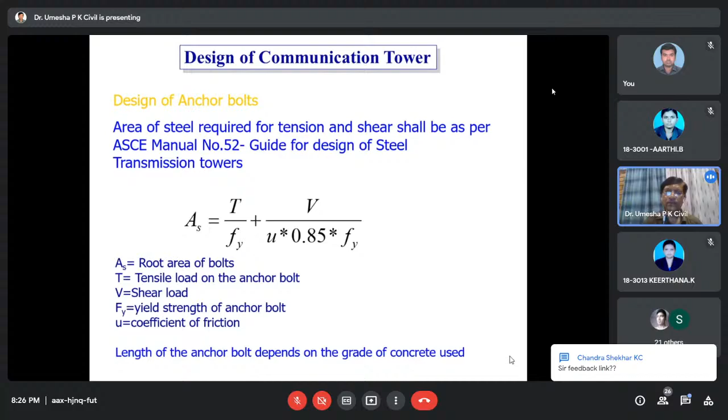Forces on the foundation of a tower include uplift, downward thrust or compression, and lateral force or shear force in both directions. These are the forces you need to consider for foundation design. The soil properties at the site need to be investigated, including density of soil, safe bearing capacity of soil, coefficient of friction, and angle of repose. All these are required, and accordingly you have to design checking both tension and compression, since the tower is subjected to both.

Foundation type may be isolated footing, pile foundation, or rock anchor, depending upon the soil condition. If you have very good soil, isolated footing may be sufficient. If you have very soft soil throughout, you can go for raft foundation or pile foundation. If you have good rock beneath, you can use a rock anchor. You need to check for all conditions: downward thrust, uplift, overturning, sliding, bearing capacity, and shear checks.

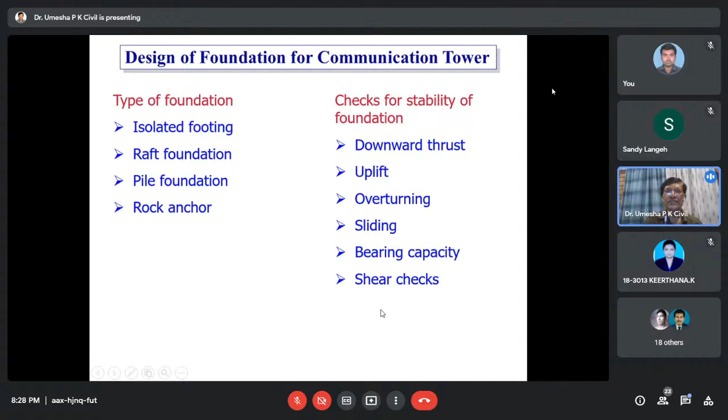Another important topic is the rooftop communication tower. For a rooftop communication tower, you need to check the existing structure or building to see how safe it is. We need to do non-destructive tests, either rebound hammer test or ultrasonic pulse velocity test, or use a profometer to know the number of bars, or use partial destructive methods such as core cutting of the column.

These are the steps to take before working in an existing building. Loads from the tower need to be transferred directly to the existing column, not onto the slab, because these towers have both tension and compression. Once the wind blows, the slab could pull up, so we should be very careful and ensure all loads are transferred only to the column, by proper welding of the reinforcement for the pedestal bars, anchoring them to the column through proper drilling and grouting.

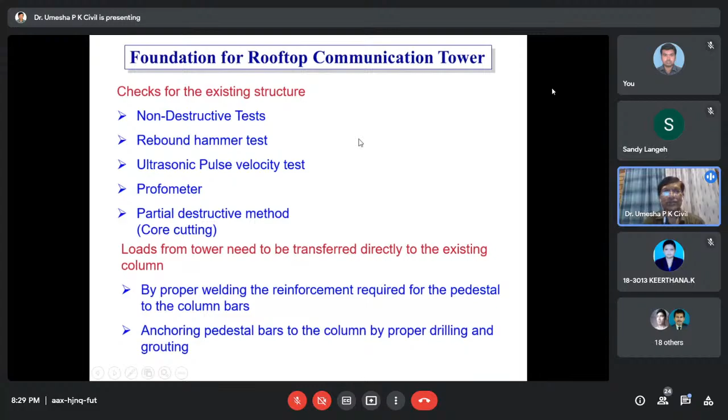So this is the rooftop tower. I haven't given any calculations here. If somebody is interested, I can show that in the next class. Otherwise, I'll close with this.

If you have any questions, I will answer them. Thank you for this wonderful presentation and for taking the time to share your knowledge, sir. Thank you so much. Okay, thank you, participants, please ask your questions.

It's a very tough topic. We should understand how to design the tower members. The main thing is the load calculations. If you know how to calculate loads, many software tools are used, but we may not know how the calculation is done internally, so we end up using it as a black box, not knowing if it's correct. So before that, you should understand how to calculate wind load and earthquake load and how it is taken in the software. Once you understand the basics, then when you apply it in the structure, you will get a good idea.